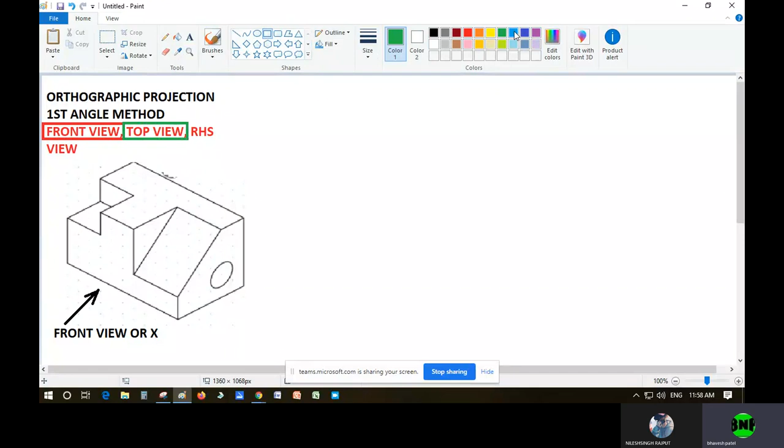We are going to solve the orthographic projection problem using the first angle method. The drawing is given to you. You have to draw the front view, top view, and RHS view. So you have to draw these three views, right? Okay, so first of all, we have to start with the XY line.

So let us draw the XY line. So I have drawn the XY line. So this is X, this is Y.

In first angle method, we know that the front view is above the XY line, the top view is below the XY line, and the RHS view is on the left hand side of the front view. You have to look from the RHS side, but you have to draw it on the left hand side.

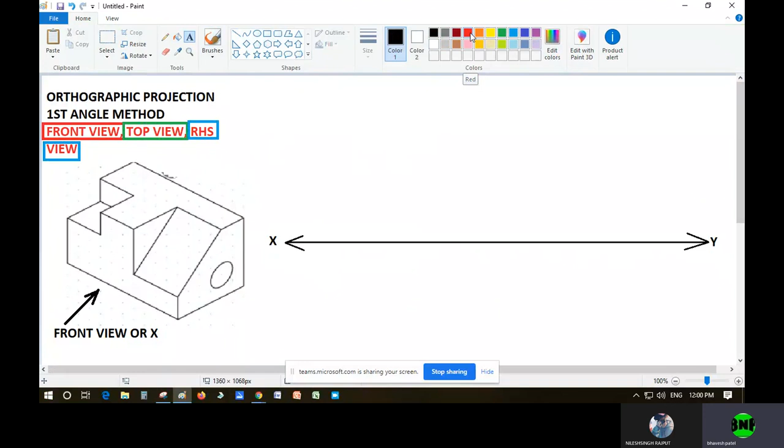So my dear student, here what will be able to see from the front view, that we will see. I will just show you. These are the areas that we will be able to see, so I will just draw this. You have to only draw the border line, but because you can understand it easily, I am drawing this. So indirectly, what you will be able to see, that we will draw.

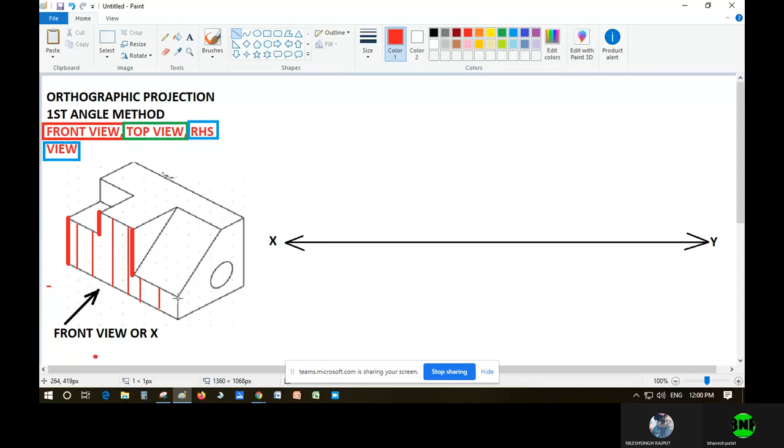So I am drawing this line. This area is very clearly visible, you can see, my dear student. Then this I am writing.

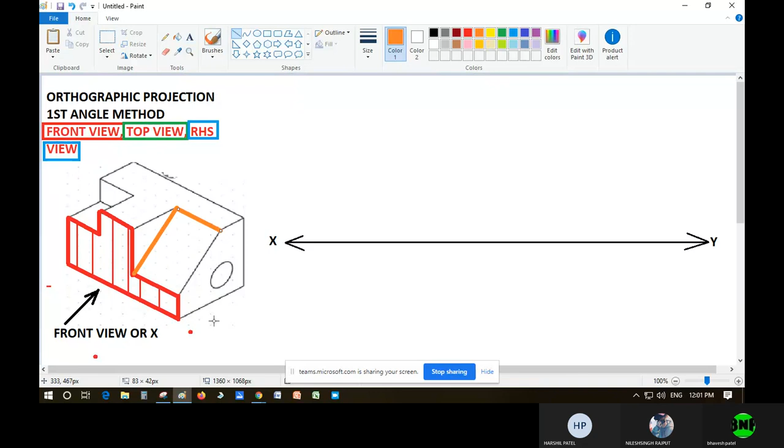Then this part is also visible, that also I will show you. So I will make it in orange color. This part is also visible, you can see in the front view. This thing also you can see, so I'm just shading it with different color. You have to just draw the border line, I have already told you.

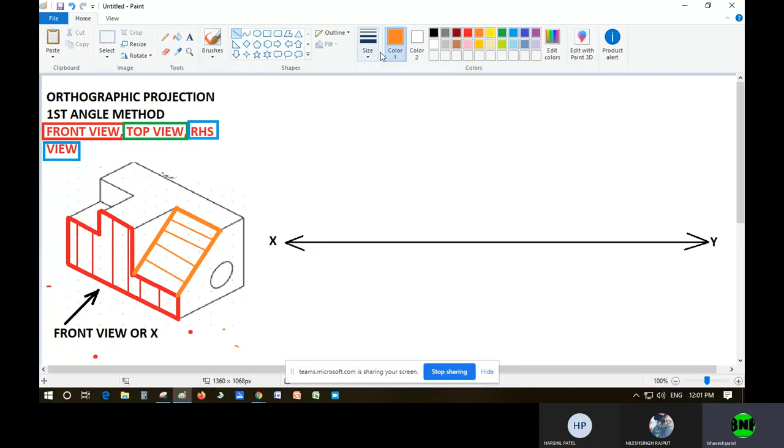Okay, what other thing will you be able to see? So my dear student, the other thing we'll be able to see, okay, just I'm taking pink color. So the other part that we'll be able to see will be this, I think you can see that. So this rectangle also we'll be able to see. So here also I'm drawing just.

Okay, so now these three parts we are able to see easily, right? So let me write here 1, 2, and 3. This is just for your knowledge, my dear student, that these three parts we will be able to see in the front view.

Another thing is also visible, but this is a cylinder, so this cylinder we won't be able to see from the front view. There is the cylinder, meaning we have to draw dotted lines for the cylinder. Okay, so these lines are there. Remember these lines, see, I have drawn one line, I have drawn another line also, like this. It will be throughout this particular object, right? So you have to draw the dotted line for this hole also.

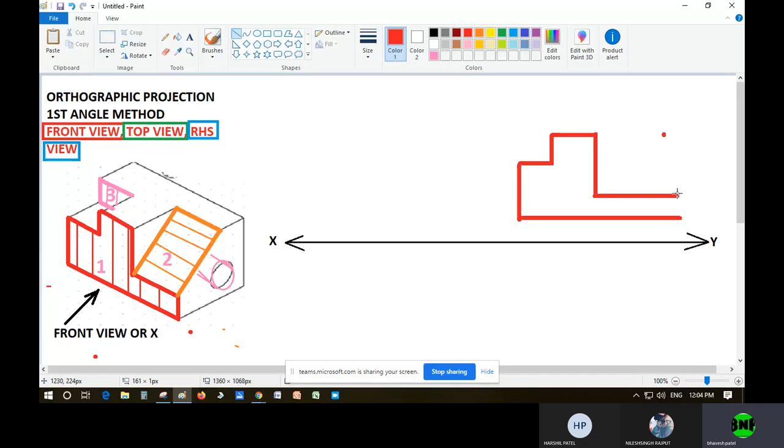So let us draw the front view first, how it will look. So I will try to draw number one. The front view will look something like this. You have to draw as per the dimension. Please don't draw blindly, please draw as per the dimension.

Here no dimensions are given, so I am just drawing the shape that you will be able to see. Now this number one I have drawn. You did not need to give any numbering. Remember, you did not need to give any type of numbering, this is just for your explanation.

This number two also will be able to see, but how, I will show you. So you will see this much rectangle only. So this rectangle you have to draw for this orange. Okay, so I will draw this rectangle. So this is number 2.

Now for number 3, which is on the left hand side, that is also visible from the front view. So I have taken the pink color, let me take the pink color. So see, my dear students, we have completed the front view.

Still something is remaining, so that is number 4. So number 4 is also there, there is a cylinder. So this cylinder border line you have to draw. How much distance is the cylinder from the bottom? How much distance is from the left hand side? This border line and this border line, so as per that dimension you have to draw.

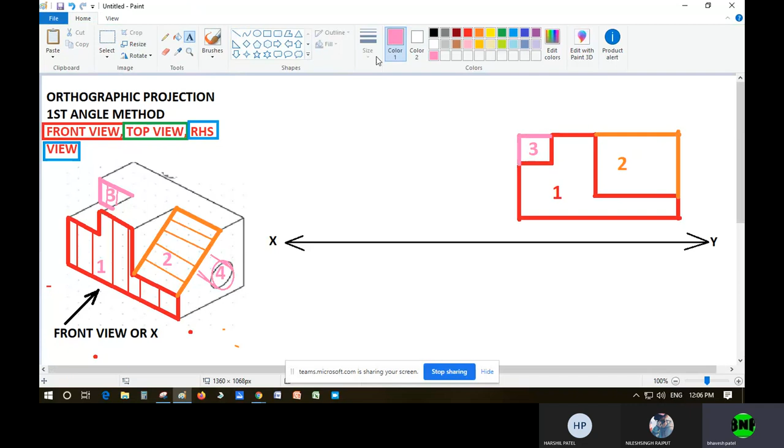And you have to draw the dash line because the cylinder edges are there, but we are not able to see that line. Okay, so we have to draw the border line. Let me show you by the black line. I have told you, dash lines.

So see, my dear students, this is representing the hole, the number 4, right? Now with the hole you have to draw the center line. For the hole you should always draw the center line. So for that center line I will just draw it, see. Now I will draw the center line, and the dash line are different, my dear students. So see, this is the center line.

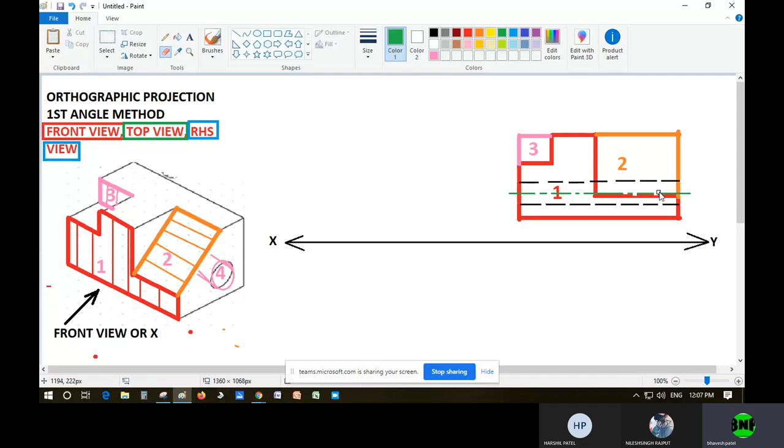Like this. Okay. Because it is a cylinder, we have to draw the center line. So this is the front view, we can see.

Okay. Now for the top view, what we have to do? For the top view, we have to extend the lines in the downward direction. This line should be very, very light. I have already told you these lines should be very, very light. So like this, second line, this third line, this fourth line. I think these lines are enough. There is no other line that we can extend downwards for the top view.

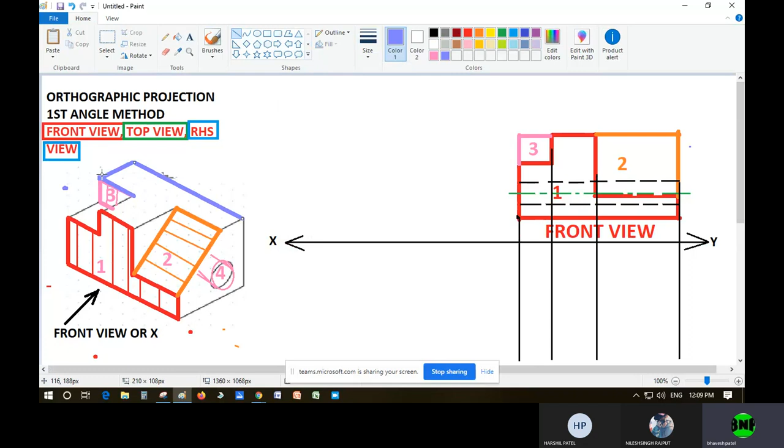So in the top view, what will we be able to see, my dear students? So in the top view, let us consider some other color so that you are able to see easily. So I will just select the borderline that you will be able to see easily. So this part is easily visible. I'm going to show you with this line also. This T is clearly visible from the top part. So let me name it as 5. Okay. So 5 is clearly visible.

Another thing that is visible from the top view. Top view means here from the top. So this is top view. So what other thing is visible? So this number 2 is also visible. So I will write here number 6 because 2 we have already drawn. Right. So this 6 is also visible, and the other thing visible is this 7 part. Okay.

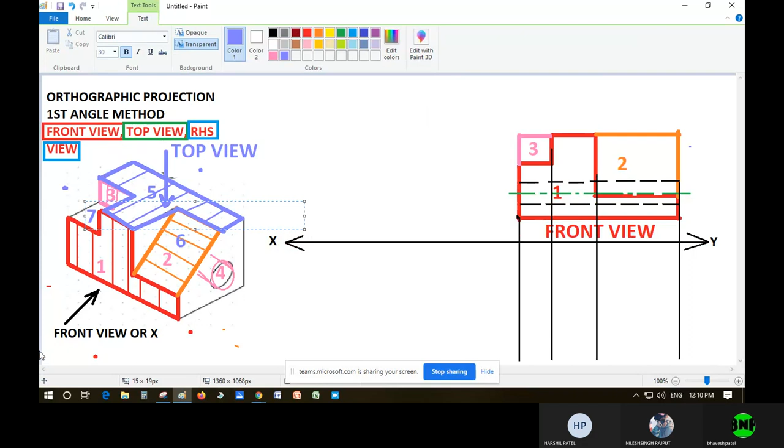Another thing visible is, let me select this color so that you are able to see it easily. So this also I can see. This whole part I will be able to see easily. And here also this 7 surface will be able to see easily, right? So 5, 6 and 7. And from the top view also, this 4 number, the cylinder will be there, but we won't be able to see it. So let me give it number 8. So this 8 cylinder part also, we have to draw the dotted line.

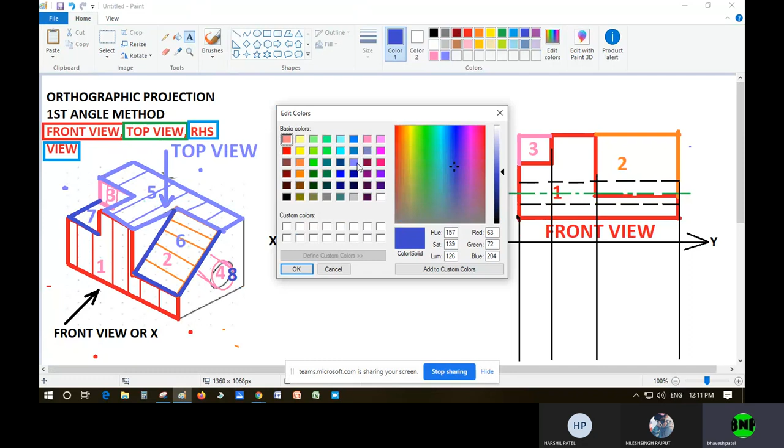So this top view, let us start with. So I will start with this thick line. So here we have to draw like this. Okay. You have to extend all this particular... I have told you, you have to draw as per the dimensions given, please. So this is very clearly visible, right? So let me write here 5. Okay. Now what other thing is visible? 6 is also visible. So if 6 is visible, then how it will be visible, that I will explain you.

So it will look something like this. So this 6 number rectangle will look something like this. It will be of this dimension and this, right? Okay. So this is the 6th number. Now let me erase it. So here I will draw like this. And another is 7 number, right? So 7 number also we have to draw. So this 7 number will be something like this.

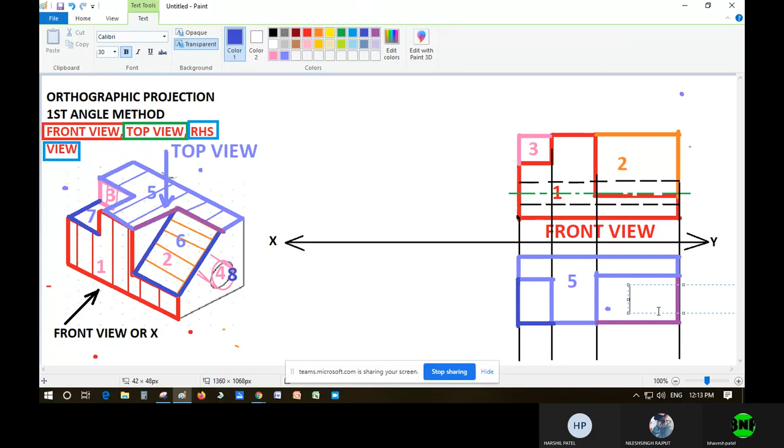Okay. So let me give the name. So this is 6 number. This is 7 number. You have to draw as per the dimension. There is no need of writing these numbers, but so that you can easily understand, I am doing all this. Okay. So now there is a cylinder which is throughout. There is a hole. So from the top view, we are not able to see this, but we have to draw the dashed lines.

Okay. So as per how far it is from this, this distance you have to measure from both these edges, and then we have to draw the dotted line. So as per the dimension, I will draw the dotted line. Dashed line, or you can also call it dotted line. So this is dotted line, you can see. It is also known as dashed line. It is not center line.

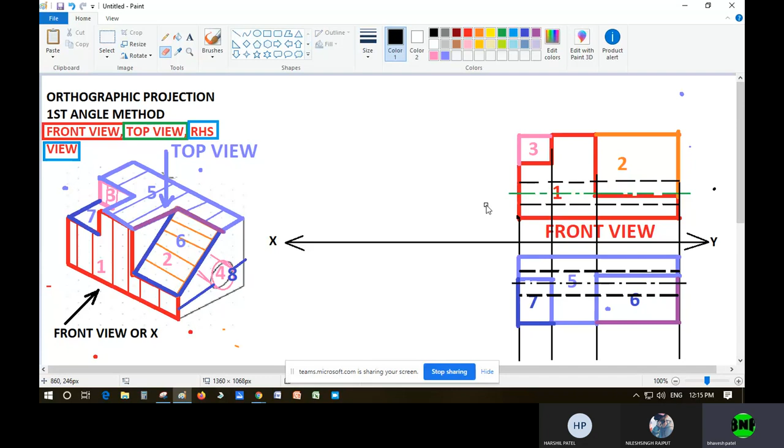Center line is that line which is drawn from the middle of the circle. Because this is the cylinder, we have to draw the center line also. So let me draw the center line here. Like this. So like this. Okay. So this is nothing but the top view. So we have drawn the two views.

Now you know the RHS view will be towards the left hand side. Because it is the first angle method, we have to look from the right hand side, but you have to draw the view on the left hand side. So for that part, first of all, I will extend all the lines from the front view towards the left hand side.

This also I have to extend. The cylinder line also I have to extend, because the cylinder line from the front view and top view, they will meet with each other. This line also I have to extend. And this line also I have to extend. See, I have extended all the lines. So now, for extending the views from the top view, I have to draw one reference line. Let me write it here, reference line.

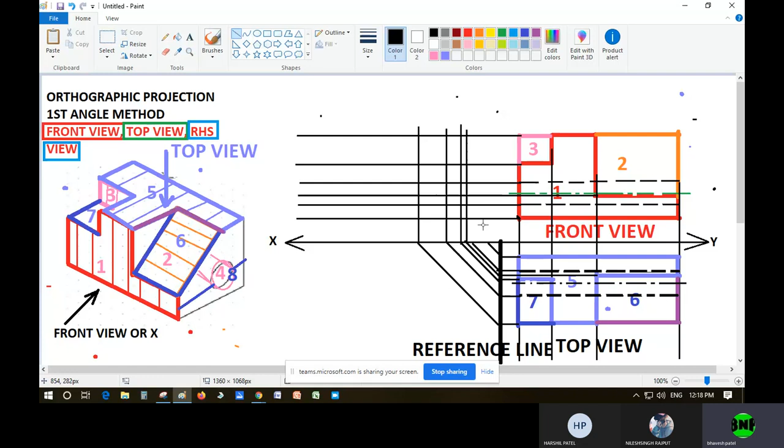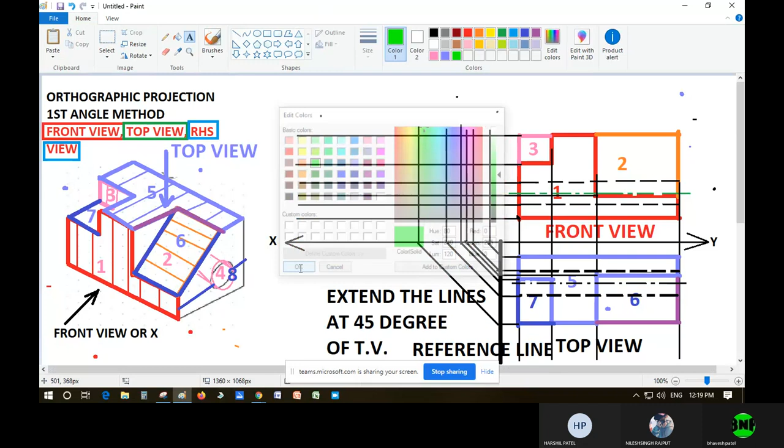See, extend lines at 45 degree of top, right? So this is 45 degree, then we are extending vertically so that the two lines are meeting with each other. Now what we can see from the front view, my dear, I will show you by this green color the lines which are clearly visible.

So first of all, this part I am easily able to see, this green color. See, this part is very, very clearly visible, my dear. I am drawing these lines also so that you can understand it easily. Now, this circle is also very clearly visible. I am taking the dark circle. So this circle you have to draw as a circle, remember.

Now you do not have to draw the dotted line. We are drawing this view, remember. So this is nothing but the RHS view. So this part is very clearly visible, my dear. So now this triangle and this circle is very clear. So I can give it the name 10. Okay, so this 10 part you have to draw. Now this thing is also visible. So let me select some other color.

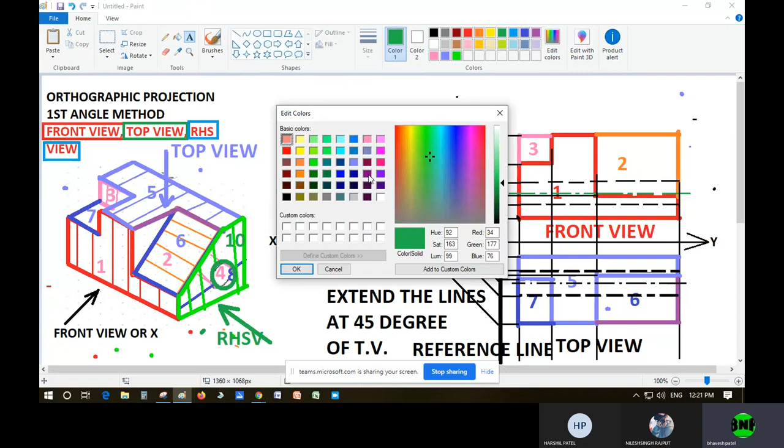Okay, I will take this dark green. So this part, this rectangle is also very, very clear. So let me give it the name 11. Okay, so this is 11. And another thing that is there but I will not be able to see, now you observe properly, this slot is there, so this wall is there. See, green color wall I am drawing, but you are not able to see it, my dear, right?

So you have to draw it, but it will be shown by the dashed lines. See, I am drawing the dashed lines, and I am denoting it by number 12. Okay, so this is number 12. Let me color it black. So 10, 11 and 12 you have to draw, and of course this circle is also there, so let me give the name 13. The circle is also visible.

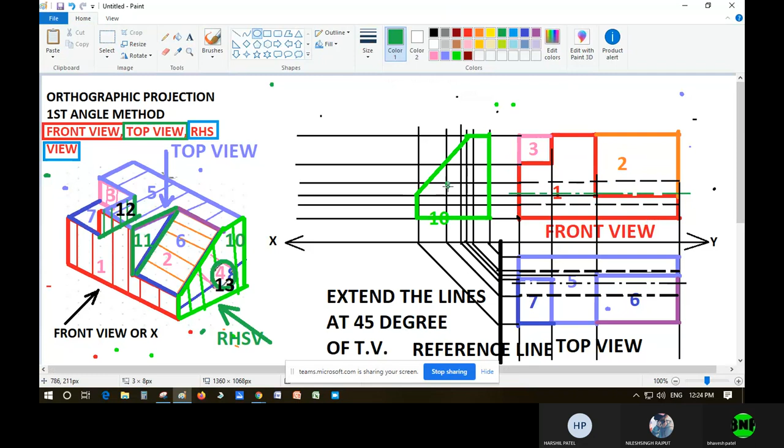Now what else do I have to draw? I have to draw the circle. So this circle will come from this black dotted line, and here. So where these two lines are meeting, I have to draw it here. So the circle will be somewhere here. Like this. So where the two dotted lines from the front view and top view are intersecting with each other, there will be the circle.

Another, this triangle will be there. So this triangle I have to draw here, this number 11. So it will be here. So 11. Now I have told you this number 12 is also there. So for number 12 you have to draw the dashed lines, because these lines are there but we won't be able to see them.

I will take this red color and I will draw the dashed line as per the dimension. So this will come from this line, and I have to show it by dashed line. So dashed lines like this, like this, like this, and like this. See how I have shown you the dashed lines. So this is number 12. So this is, my dear students, let me write, the RHS view, right hand side view.